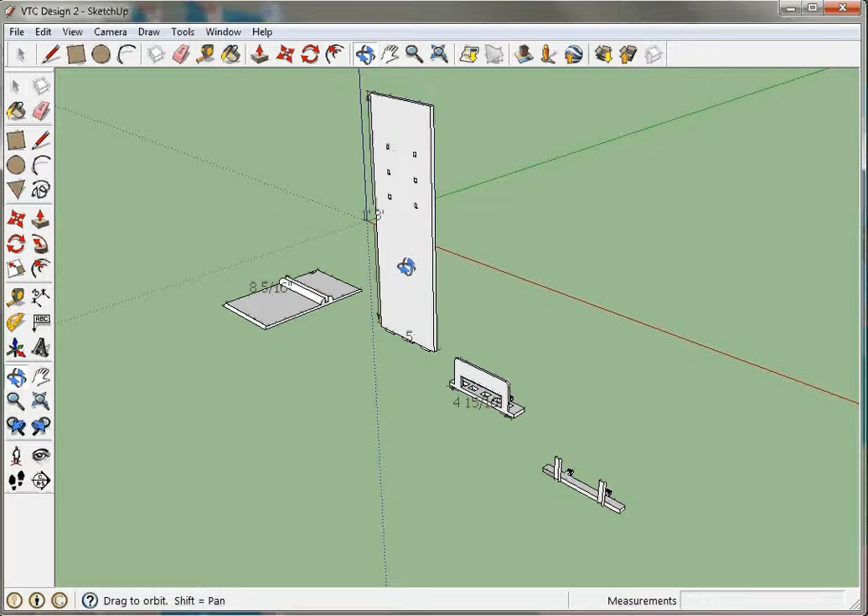Okay, this is real quick what I think will be one of my final designs before I try and kick this off to somebody who really knows what they're doing. I did this 3D design real quick.

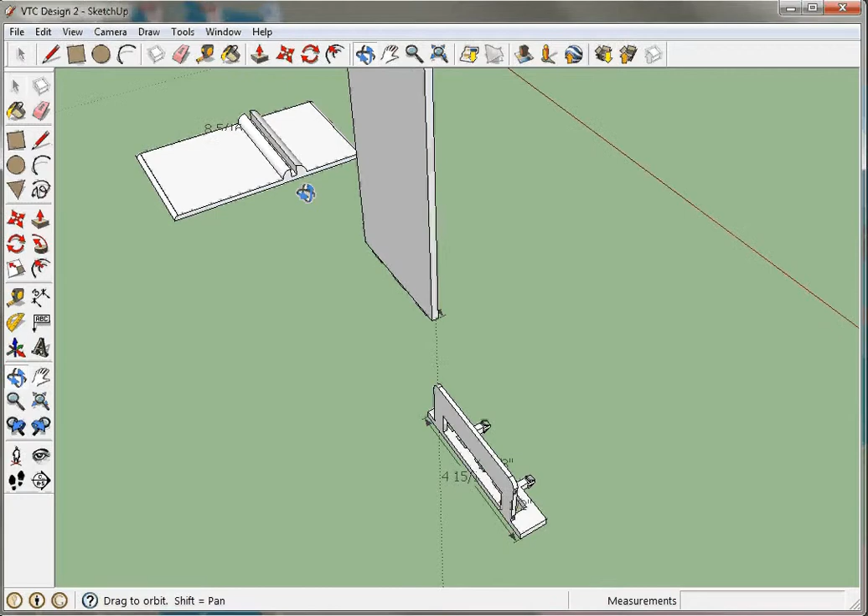The principle is the vertical piece here hooks into the horizontal piece, but rather than sliding in with a T-bar, it's actually got some feet to it, and they go into certain slots at predetermined angles, so it goes out, and then they have support bars that come up and support fore and aft of the vertical piece, which I think will make for a much nicer overall ease of entry and not having problems with dust and dirt and other issues.

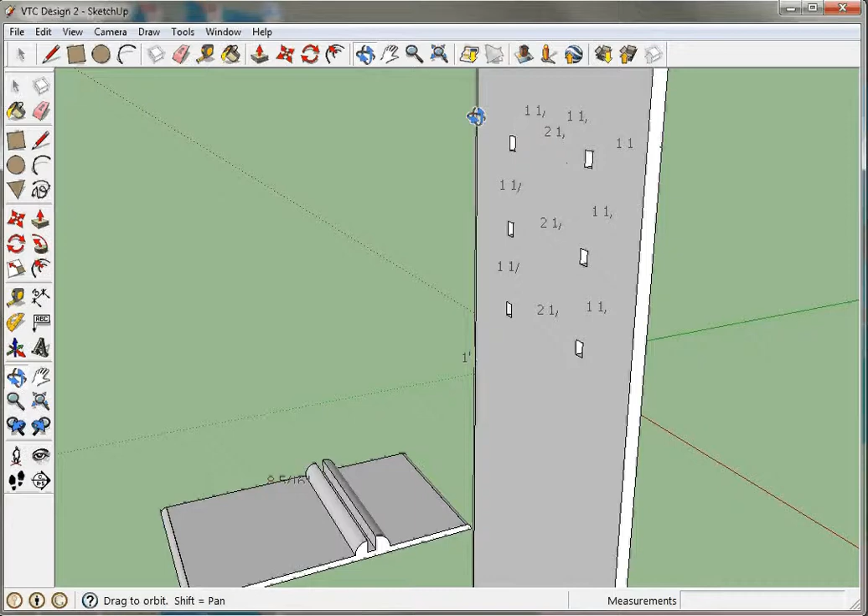The other thing I did is make detachable pieces with little holes here. The holes are prearranged, and each of these pieces can be attached, and I did a sort of plastic clip so they snap into place and secure. All the pressure on the device is going to be up and down, borne right here on these little stand areas, and we just have to make sure it doesn't slip back or forward and fall out of place. That's why we have the catch mechanism.

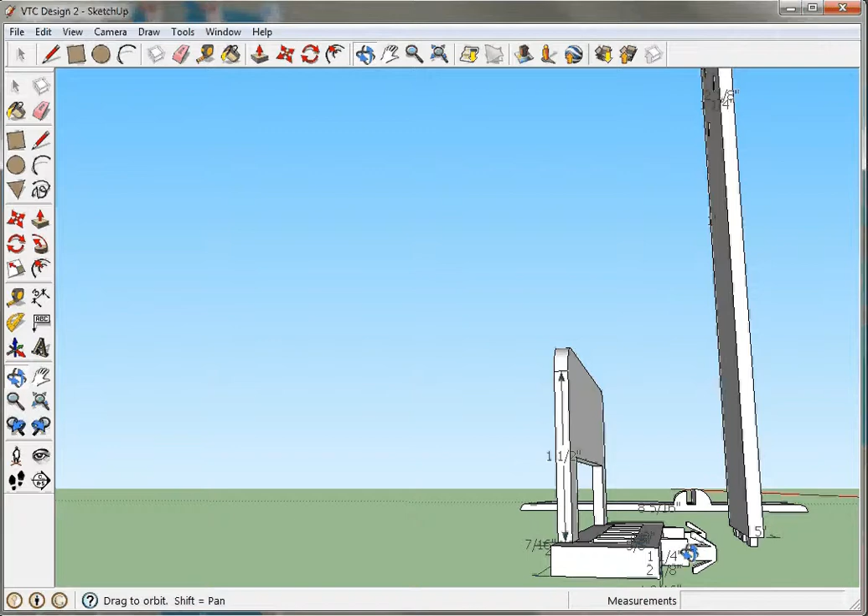I originally did an L bracket here, but I realized I couldn't get the protection of the front of the phone given the depth—it was too shallow. And there's a 45-degree rule, so if there's no 45-degree angle cut off here, you can't have an L bracket. That would have been nice and simple, but I worked on the design, and I think this will work and snap into place.

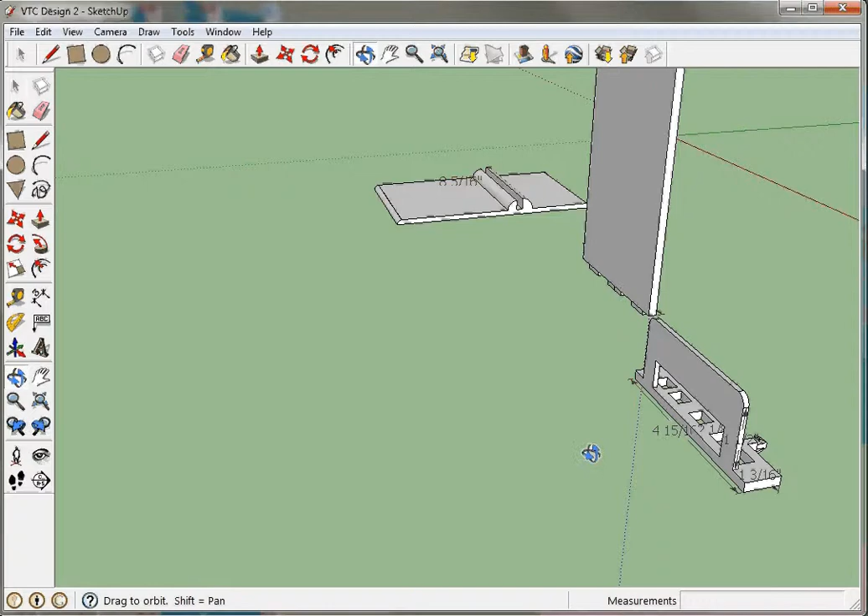I did one for generic phones. My phone in particular was difficult because the power plug is actually on the underside, and the volume is up here, so you can't put it on its kickstand, which is frustrating. But I put some holes in it that are the standard diameter for a lot of the USB sockets, and gave it a little extra room too.

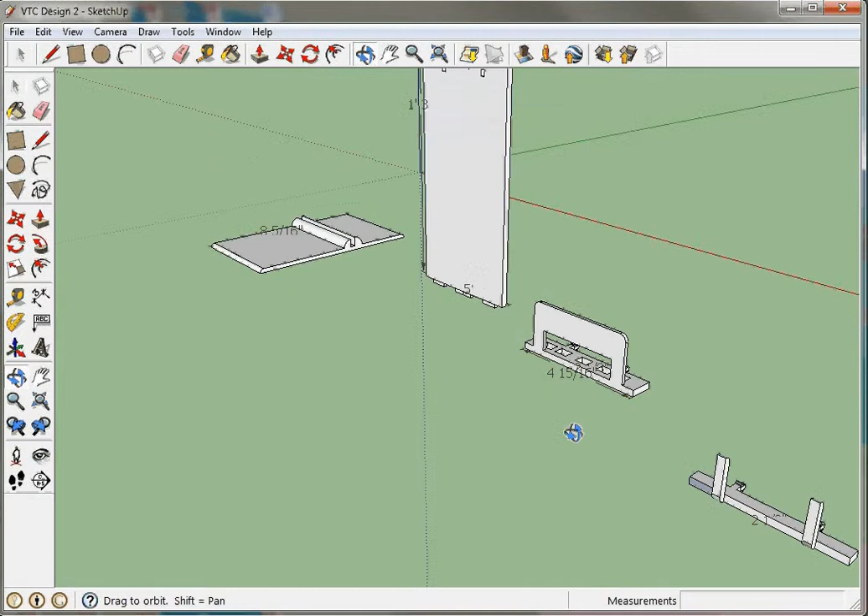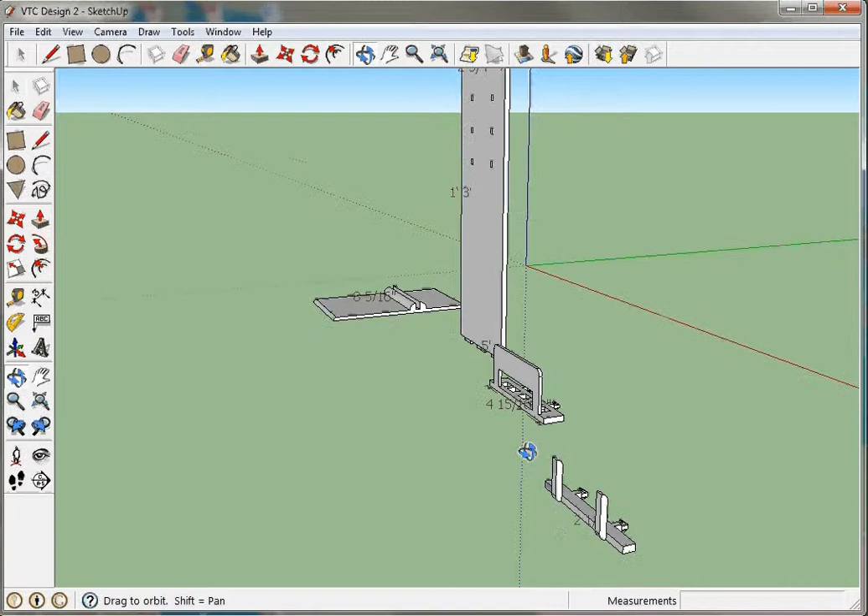For the iPhone, power comes from the side, so this is designed so you put this bracket in and then put the iPhone in, and you'll be able to slide it in and out a little. You get a lot more faceplate time. Most of the chat is the bottom and top of the screen, so this shouldn't be too big a deal. It'll be a little annoying that you have to divide up the face, and I'll see whether people think we should bring this up higher in future, but the gist was to create something safe, sturdy, and capable for the trial run, and go from there.

So 15 inches in all for the vertical piece, a little more with the feet. Overall, something that'll definitely be at eye level when you take one of these pieces and put it up on the top part. So that's the design—all the completed components and everything else.

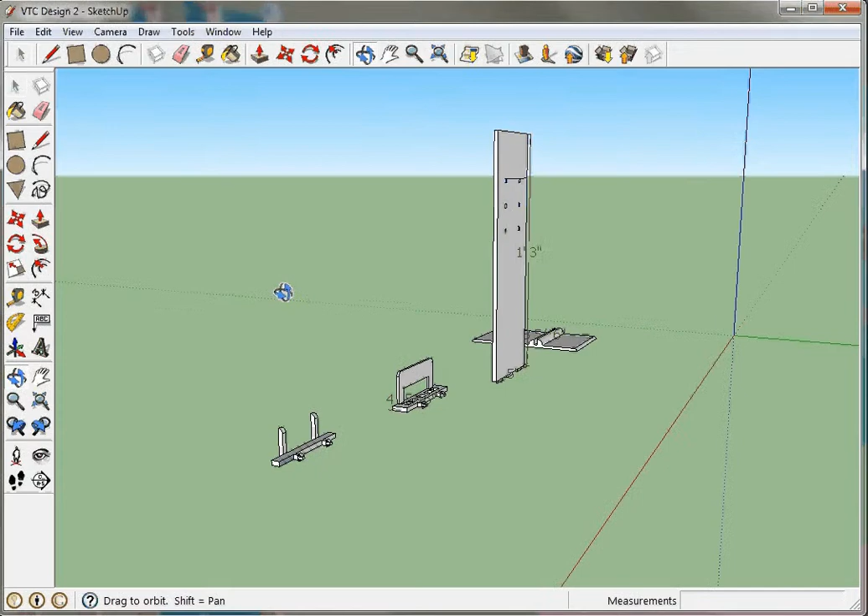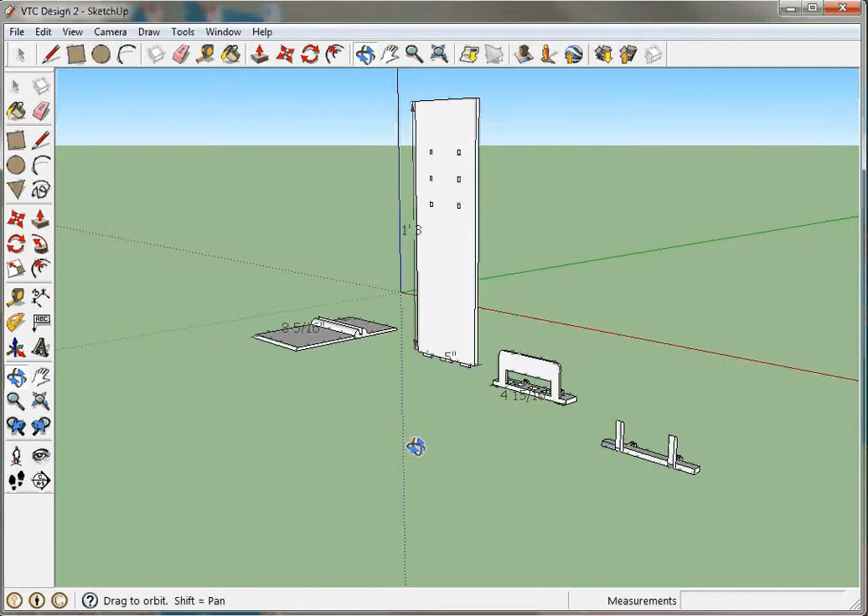This is actually reasonably accurate. I think when I do everything out and take all these individual measurements on the side, I lose something a little bit, so I know it's not to like 0.001 or anything like that. That's one of the things I don't know if I'll need right now, but in the future, for designs to go straight to the manufacturer in China, we need to make sure that's done.

But the AutoCAD design, if that can be very, very accurate—I don't even know to what degree the differences need to be for all of these items. That's another thing: when you're fitting plastic together, do you want 0.01 off, or 0.001 off? I think that kind of depends.

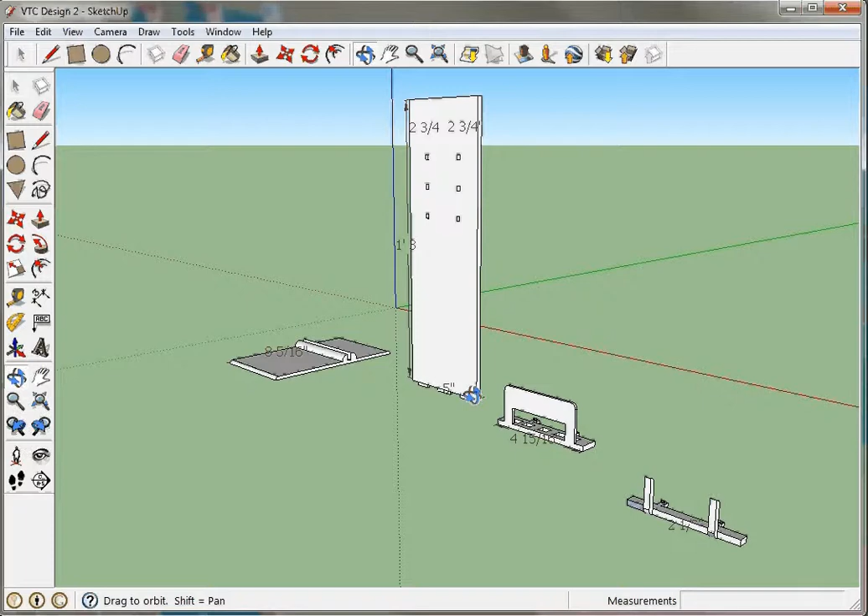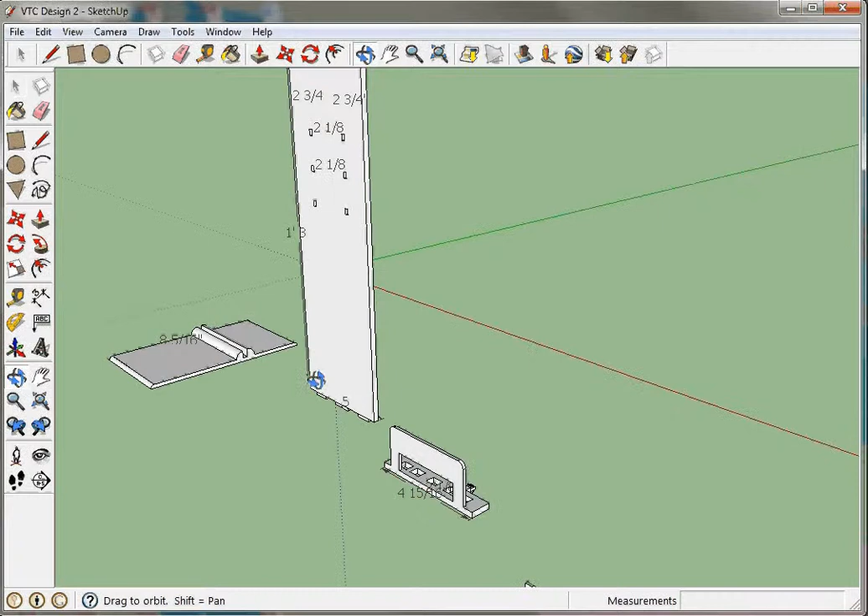The feet here, you definitely want to get as stuck in as possible, because that's a base and you want it nice and sturdy. These items, the two mounts for the phone, I think can have a little wiggle room. The biggest concern is making sure there's no fore and aft motion from this as best possible, so that's why I did an offset. This little chute here—the half circle, actually quarter circle, and the quarter cylinder—are a little different, so you can wedge it in and it'll stand itself straight up. Given the actual plastics, I guess it'll be plastic or acrylic.

So that's the design.